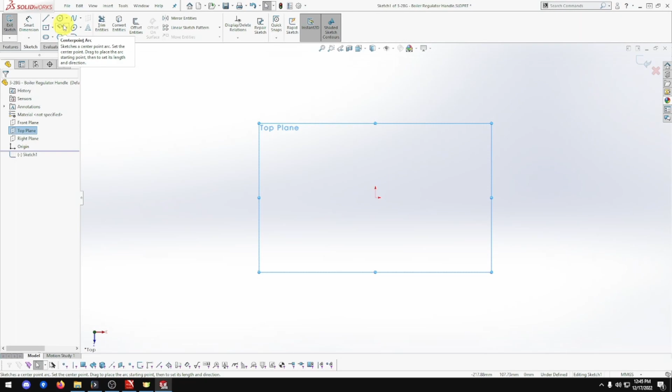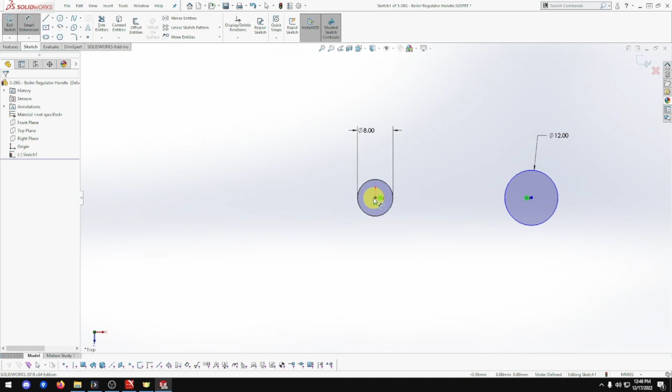Okay, let's go to top view. Let's put two circles down. One is 12 mil, and this one is 8 mil. Let me just make these horizontal. There we go, beautiful. And that's going to be 38, from there to there.

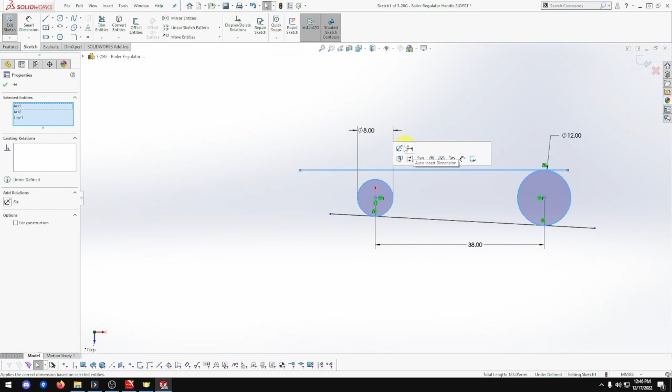We do a line. Oop, not parallel. Select that one, beautiful. Then do another line from there to there. Right, let's make these tangent. Yeah, tangent. These ones tangent as well. That one and that one. Although it didn't show up tangent, there it is. Tangent. There we go.

Okay, trim. Trim those two. That one, that one, that one, and that one. There we go, that's what we're after, that's what we're going to do. It's got me a hole here, but I'm not going to put this hole because they've got bits through there first. So do that afterwards.

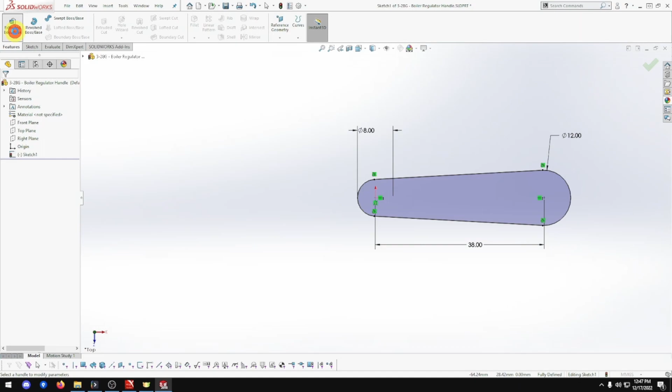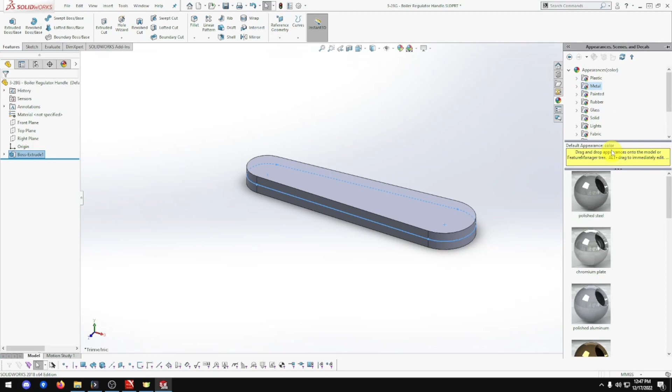That's going to be extruded to 5. Now I'm going to put that mid-plane. Doesn't really matter this one, but I'm going to anyway. And that is the steel, so let me go into steel again. Metal, yeah, there, thank you. Steel, brush steel. Let's do that one. There we go.

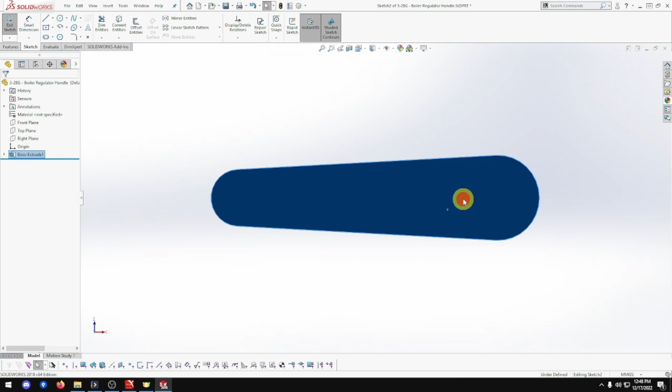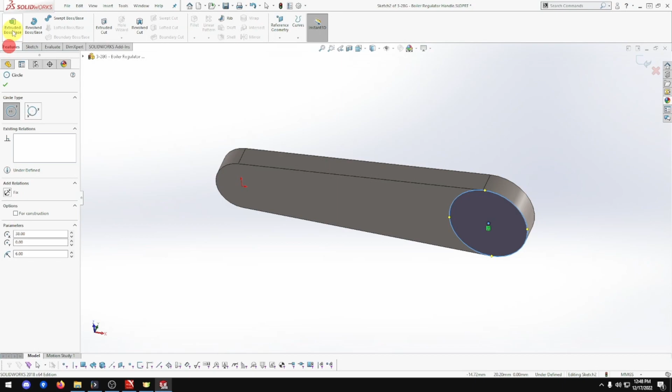Okay, so now we've got a handle come up this way, and a part come down this way. We might do this one first, doesn't matter which one really. Normal To, sketch, circle, touch on the outside of that one, and then find the center, which is there, and that's going to be the same size. That's going to extrude down 7. Extrude 7 and done. Now it's 10.5 from there to there.

So let's just double check that, make sure I got that right. From there, 10.5. Perfect. Never hurts to double check.

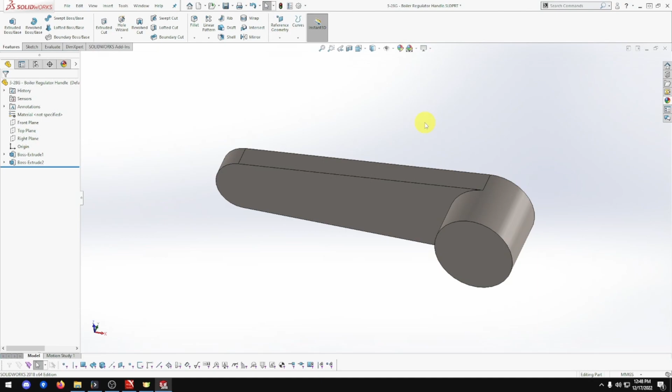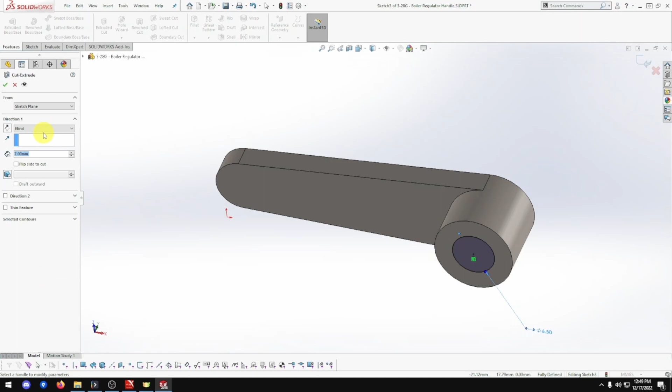Okay, so now we've got a hole here, so let's sketch that. Don't need normal, can if you want to. Touch on that one, and there. If you want to highlight it, it's easy to see the small crosshair in there, when that's blue that's harder to see. And that is 6.5, and that's going to be extruded all the way through. So extrude cut, through all, and done.

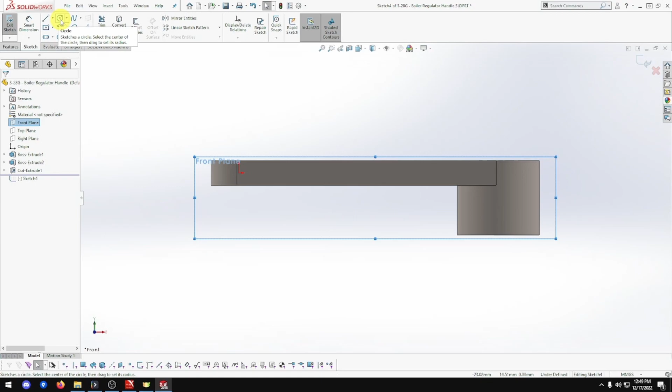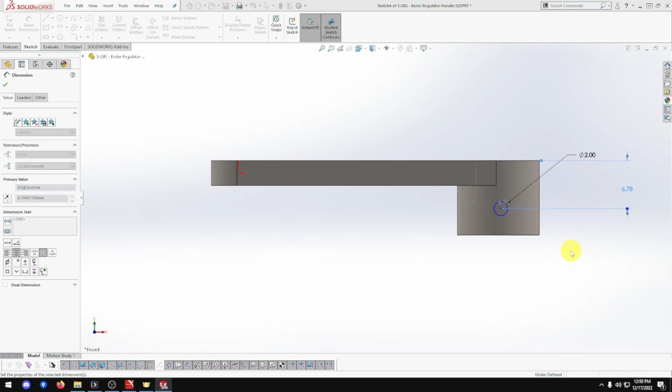There you go. And now we want front view. Let me normal that and sketch, with another hole. There, that's going to be 2 mil. From the top to there is going to be 7 mil, and from this outer edge to the hole it's going to be 6 mil because it's halfway through. You could line it up, but I know it's 12, so halfway that works. Now just move that way a bit. So we want feature, extrude cut, through all, second direction through all, which is already selected, and done.

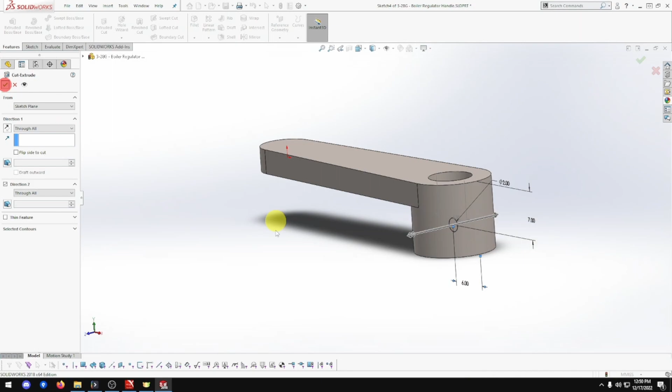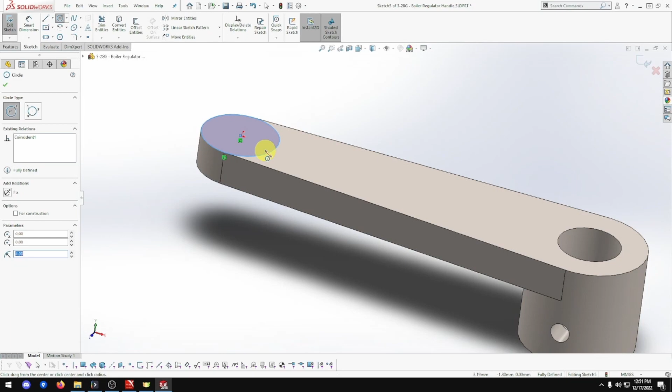There you go. Now we want this one. Go to sketch, I don't need normal. If you click that once out there, unselect that thing, you can see better. Although it's got the origin there, so it makes it a little bit easier. That is going to be there. Beautiful. That's going to be extrude 5. Yep, 5, done. Then we're going to do another one on here. Sketch on that surface, it's going to be a circle, going to be out. That's going to be diameter of 13. And that's going to be extruded by 6.

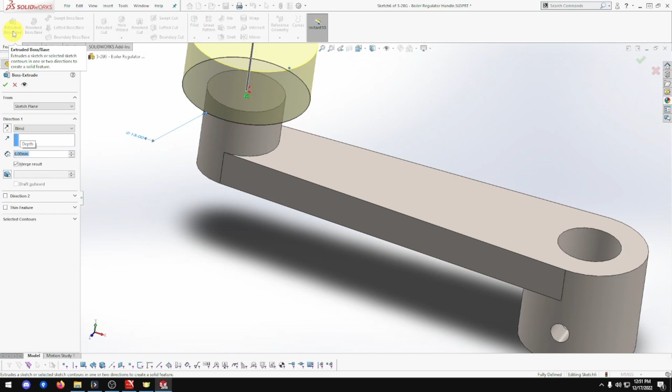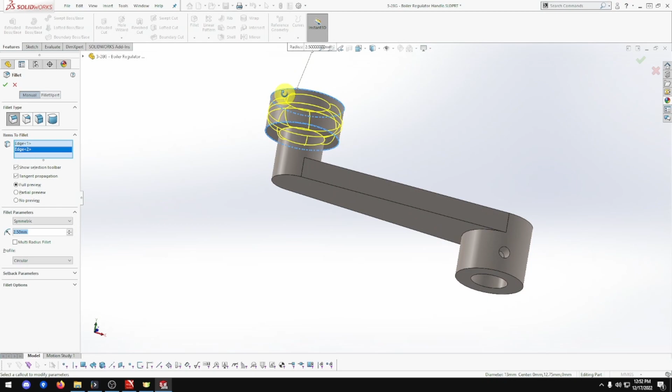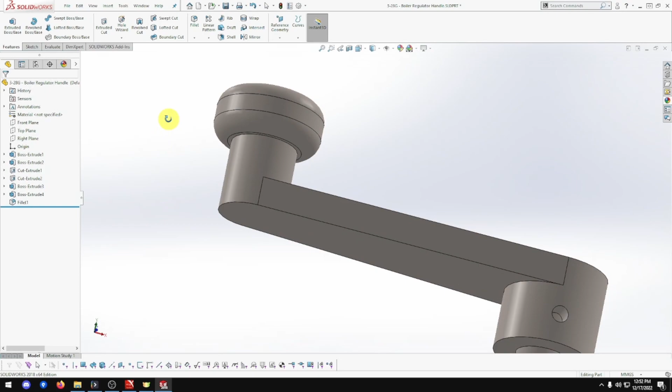And done. Right, now we need to chamfer this. So that's 6, this is a bit of a flat surface. So let's do 2.5, let's try that. Fillet, 2.5, that edge and that edge. Actually, I think that worked out pretty good because it's close to that, so look at that, done. Actually, maybe 2, let's try 2. That's better because there is a bit of flat surface. That doesn't really matter because that's where your hand holds and turns it. So I think that's it.

So that is done. Ooh, wait a minute, this is actually 2 pieces. I don't think it's 1 piece. This is actually a separate piece that slides in there and this spins. It shows in the plan as 1 piece. I'm going to leave those 2 pieces just for this 1 piece.

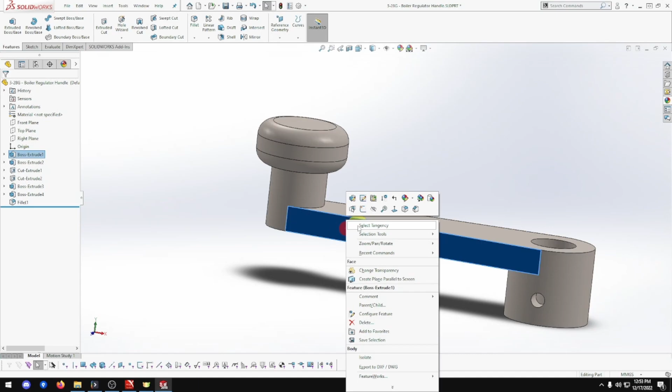But this section here, let me just normalize that. This section here, from here up, should be a separate piece that goes and then that spins. So when you turn this round, that holds your hand. Oh yeah, that's right, the hole didn't line up because I normalized that side. So yep, I'm going to leave that as is. Later on, I might come back and redo that as the second piece.

So see what happens. So that's part 3-28G, the Boiler Regulator Handle, done for the Clayton Undertype steam wagon.